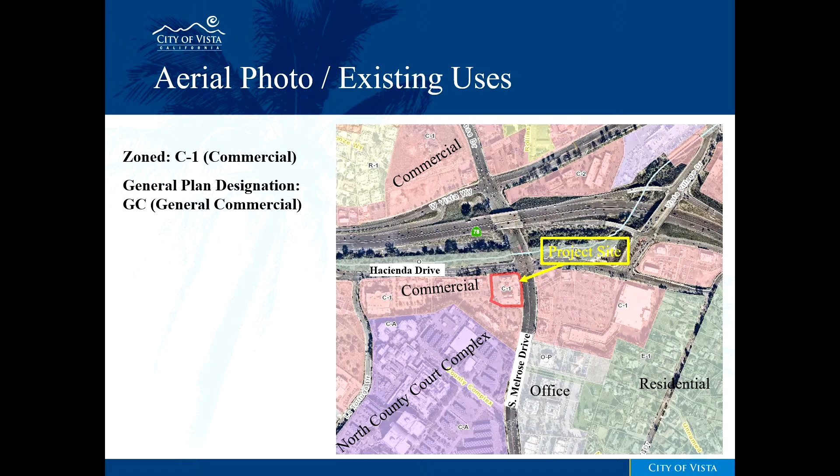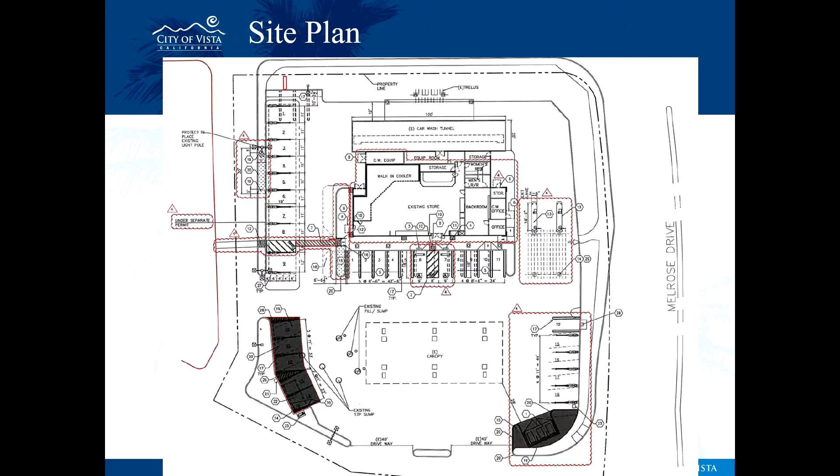This is the existing site plan, and no changes are proposed to the site plan or tenant space at this time. The property is located in Sheriff's Beat District 312 and has a crime index of 147.5% of the citywide average for 2022. An index greater than 120% of the citywide average is considered a high crime beat area. Total number of Sheriff Department calls for service since September 5, 2022 is 6 total calls. Almost all calls were for homeless activity outside the business.

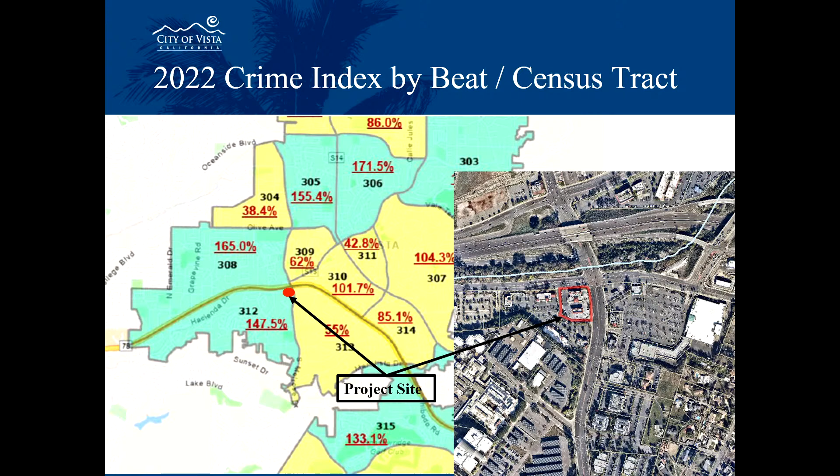An overconcentrated area, Census Tract 197.01, allows for up to 2 ABC off-sale licenses. There are 5 existing off-sale licenses in the vicinity, inclusive of the existing ARCO AM/PM. Those locations are the Costco Wholesale at 1755 Hacienda, CVS Pharmacy at 1631 South Melrose Drive, CVS Pharmacy at 635 South Melrose Drive, Albertsons Market at 1601 South Melrose Drive, and the current ARCO AM/PM at 600 Hacienda Drive.

Findings for the special use permit amendment: the proposed use is consistent with the general plan and any applicable specific plan. The proposed use and the manner to be conducted is permitted in the applicable zone and will conform to applicable federal, state, and local laws or regulations. The site for the proposed use has a size sufficient to reasonably accommodate the planned activities and will be served by existing infrastructure and utilities.

The design, location, size, and operating characteristics of the proposed use will be compatible with the existing and planned land uses in the vicinity. The proposed use at its location will provide the neighborhood and/or city with a service or facility that will contribute to its general welfare, and the proposed use and its operation will not be unduly detrimental to the health, safety, or general welfare.

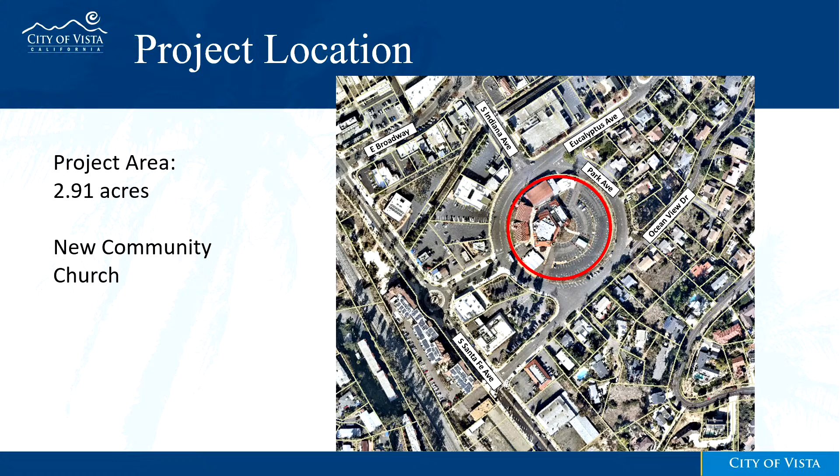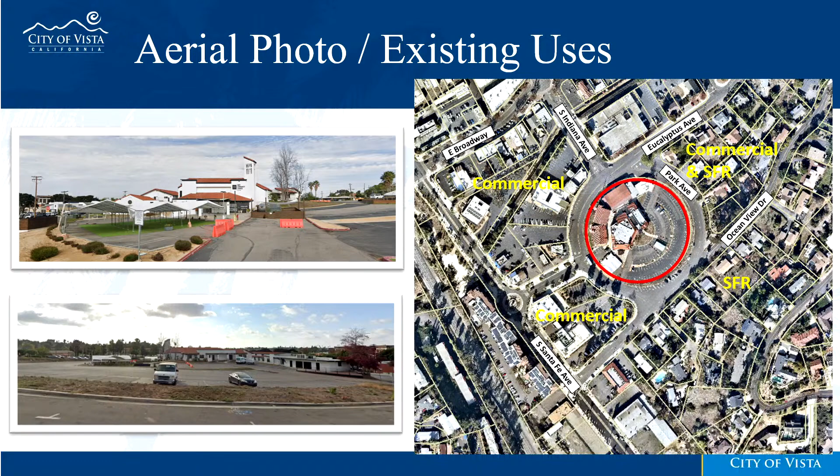The subject site is 2.91 acres, circular in shape, and is surrounded by Eucalyptus Avenue, Oceanview Drive, as well as Park Avenue. The site is currently developed with the New Community Church. Here's an aerial photograph of the site. Surrounding land uses include commercial and single-family residential to the northeast, single-family residential to the east, commercial to the south, as well as commercial to the west.

The general plan land use designation for the site is mixed use. The coinciding zoning is the Downtown Vista Specific Plan, which is located in the historic downtown subdistrict. That subdistrict allows for mixed-use commercial as well as high-density residential with a maximum density of 40 dwelling units per acre.

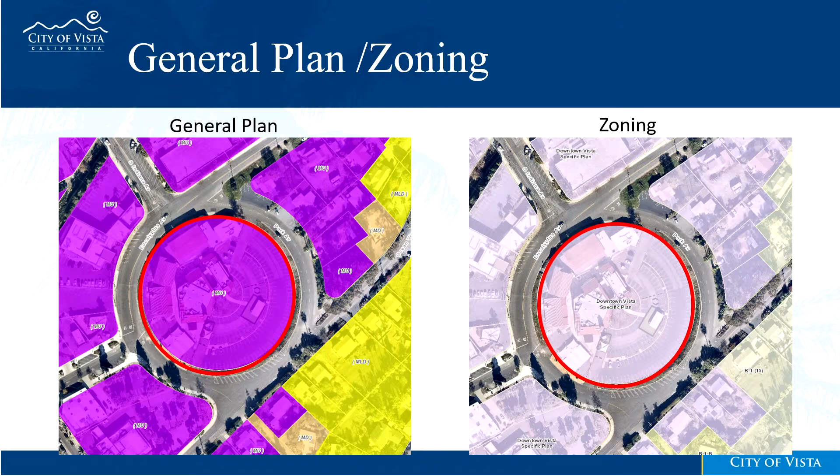The project before you tonight, again, is a request for a site development plan. The applicant is proposing 176 apartment units on 2.91 acres, which equates to 60 dwelling units per acre. The applicant is requesting a density bonus as a result of providing 18 very low-income affordable units. The project includes open space amenities, parking, site improvements, drainage improvements, wet and dry utilities, as well as associated infrastructure. In regards to recreational amenities, the project has been designed to provide a pool, spa, gym, seating areas, as well as a barbecue area.

The state density bonus law does allow for 3 development concessions based on the affordability component of this project. The applicant is requesting 2 concessions from the development standards of the Downtown Vista Specific Plan. Those concessions include an increase in building height and a waiver of a required 10-foot building facade step back.

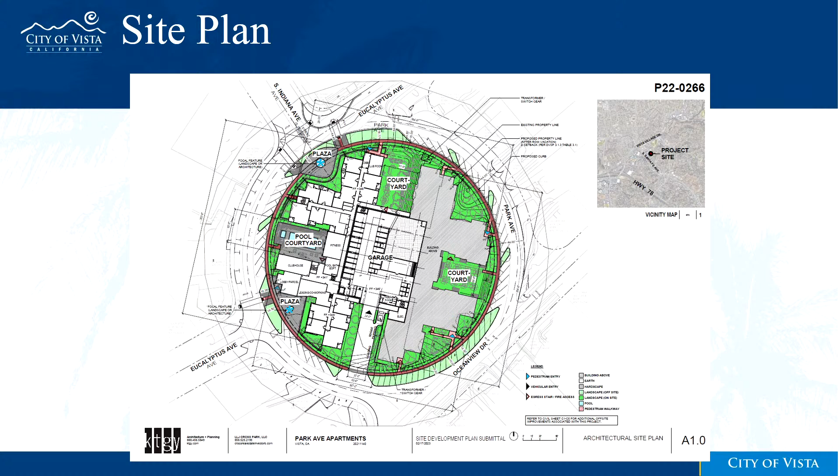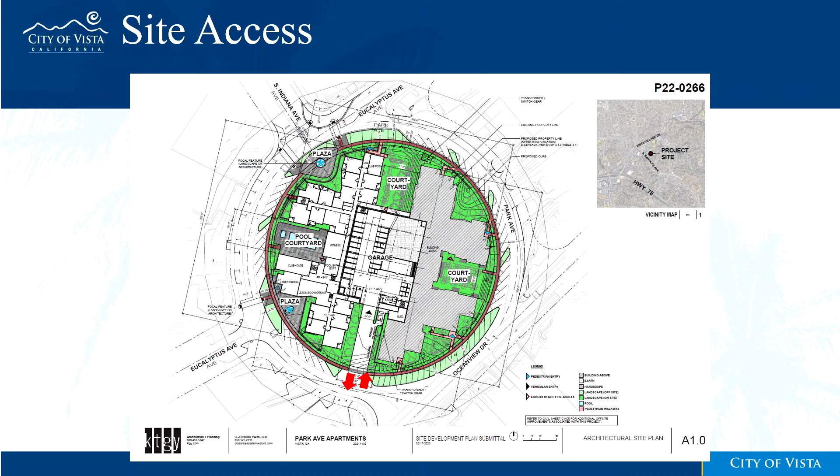The proposed site plan depicts a 4-story apartment building surrounding a multi-level parking garage, as well as landscape improvements surrounding the site. Vehicular access would be provided by a new 30-foot wide driveway that spans from Park Avenue to the parking garage entrance at the southwest corner of the project.

In regards to parking, the state density bonus law allows for a parking calculation of 1 parking space for 1-bedroom units and 1.5 parking spaces for 2-bedroom units. Based on the unit count, the proposed project is required to have 211 parking spaces on site. The project provides, as designed, 246 parking spaces. Staff notes that the project also provides 44 on-street parking spaces surrounding the site.

Staff notes that since this project does provide a minimum 11% of total units as very affordable, and it is located within 1/2 mile from a major transit stop, the state density bonus law does allow the applicant to request a parking ratio of 1/2 parking space per unit, just as a note.

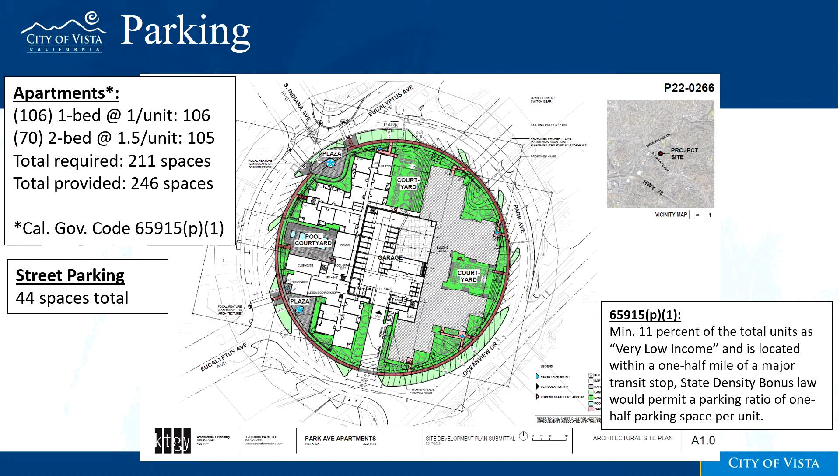In regards to landscaping, the site does provide 34% of the entire site dedicated to landscape improvements. The Downtown Vista Specific Plan requires a minimum of 5%. The proposed landscape plan does include native and non-native landscape plant materials.

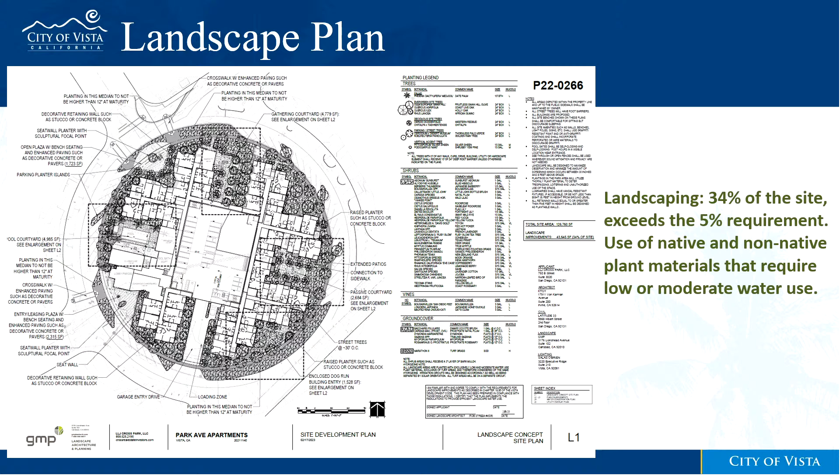In regards to amenities, the site plan indicates a pool courtyard on the west side of the project, a gathering courtyard on the north side of the project, a passive courtyard on the east, as well as a dog run courtyard on the southeast. In addition to the outdoor open space amenities, the project also has indoor amenities, including a clubhouse, fitness rooms, pet spa, and other small gathering spaces.

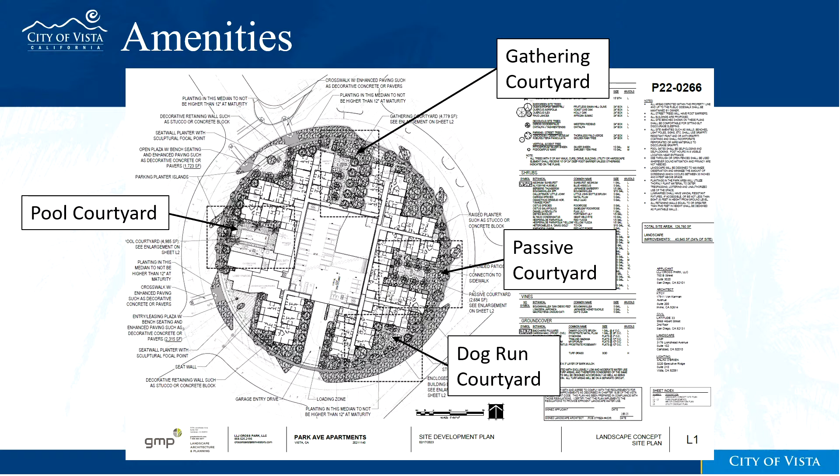Due to the drastic east-west slope of the site, the proposed project has been designed around a tiered grading approach, which utilizes the natural topography of the site. The first level of the development would include a first floor on the west side of the project. The second level would include the second floor on the west side of the project.

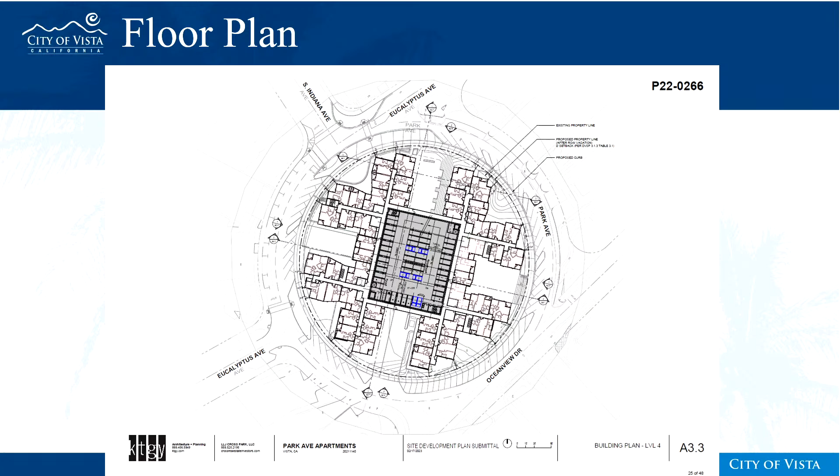The third level would include the third floor on the west side and the first floor on the east side of the project. The fourth level would be the fourth floor on the west side and the second floor on the east side of the building. The fifth level would be the roof of the west side of the project and the third floor of the east side of the building. And ultimately, the sixth level would be the fourth floor on the east side of the project.

The proposed project would be 4 stories, a maximum height of 59 feet from the average natural grade of the site. The architectural design of the building reflects an Irving Gill architectural style. Building features include 3 complementary plaster finish colors, wood grain horizontal composite siding, a decorative tower element, as well as storefront systems.

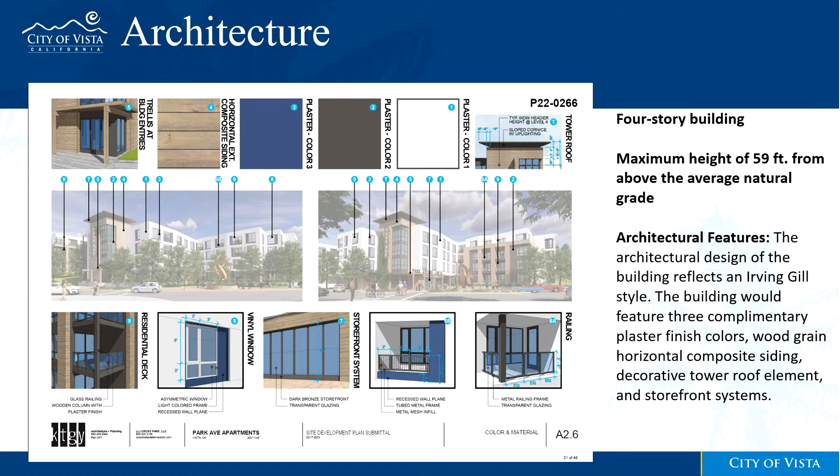Here's a perspective of the project taken from Eucalyptus Avenue. And here's a perspective of the project from South Indiana Avenue.

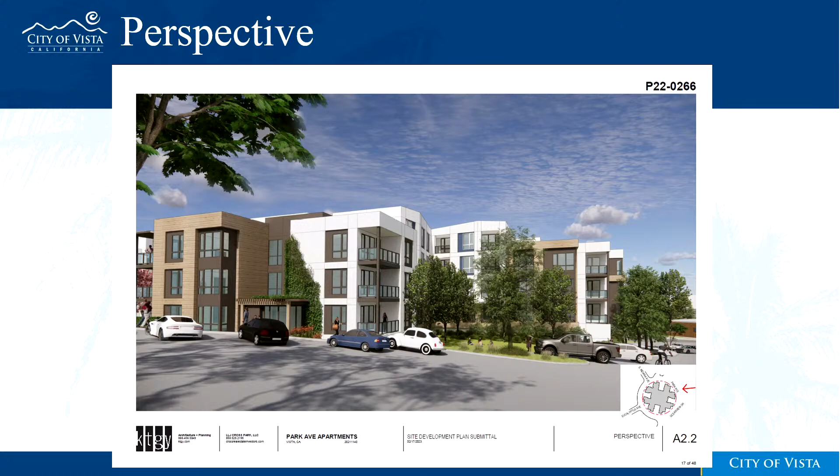Another perspective of the project from Park Avenue, as well as a perspective from Oceanview Drive.

In regards to the general plan and the Downtown Vista specific plan, the general plan land use designation is mixed use, which allows a maximum density of 40 dwelling units per acre. The proposed project includes 176 units on 2.91 acres, which equates to 60 dwelling units per acre, due to the fact that the project applicant is requesting a density bonus pursuant to state law.

In regards to the Downtown Vista specific plan development standards, the proposed project meets all applicable development standards except for two, which would be the building step back as I identified earlier, and the building height. The maximum building height in this area is 35 feet. The proposed project is proposing a maximum height of 59 feet pursuant to the requested concession.

In regards to parking, the state density bonus law requires a minimum of 211 parking spaces. The project is providing 246 spaces, and the project also complies with open space and landscape requirements.

This project went before the Planning Commission for an early design review on April 5th, 2022. Since the EDR session, staff and the applicant have worked in an effort to address the concerns raised during the EDR review. Those concerns include an increase in on-site parking.

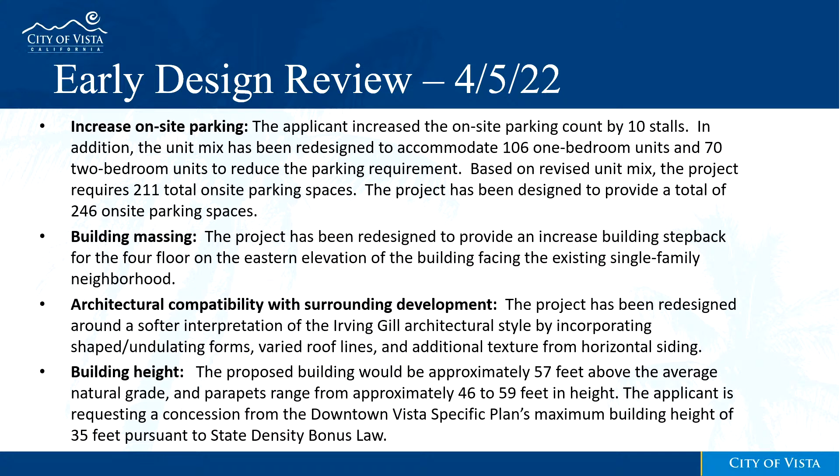The proposed project is covered by the program environmental impact report that was prepared for the Downtown Vista specific plan, as well as addendum number 1 for that specific plan. A consistency memorandum was prepared for the project. The conclusion of that memorandum indicates that the project will not have any new or substantially more severe significant impacts beyond those addressed in the program EIR or the addendum. All applicable mitigation measures for the program EIR will be enforced and applied on this project.

The project mitigation monitoring and reporting program includes mitigation measures that address cumulative traffic impacts, and those traffic impacts would be assessed via the payment of the street and signal development impact fee, which is $4,991.34 per dwelling unit. With that, staff is recommending the Planning Commission adopt the attached resolution approving a site development plan to demolish the existing church on site and construct 176 apartment units on 2.91 acres located at 165 Eucalyptus Avenue. That concludes staff's report.

The applicant, Greg Dracos, and his team is here, and they have provided staff with a presentation for the Planning Commission. Okay, if we can hear from the applicant now, please.

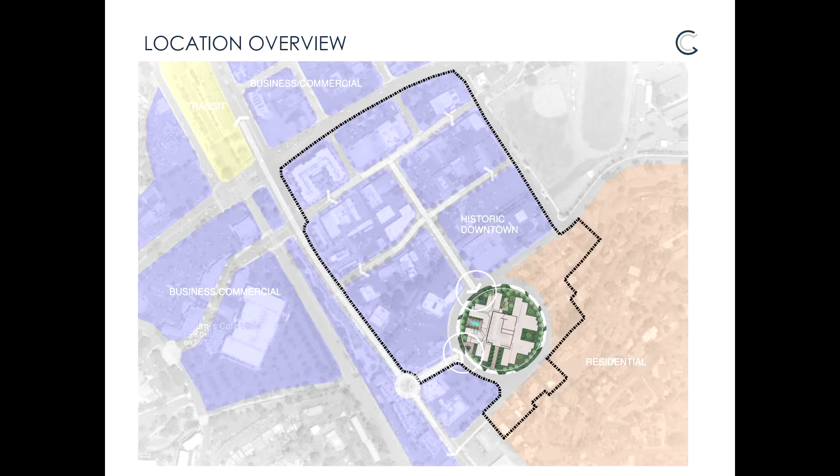So as mentioned, it's a transitional area with two buildings, and we have the concept of active versus passive courtyards. For connectivity, we'll provide 3 new pedestrian crosswalks connecting the building to downtown. There are 2 at Indiana, one of which is depicted on the site plan in front of you. There will be new sidewalks surrounding the entire site, with new landscaping incorporated.

We have 2 pedestrian plazas that hold public artwork, both looking down Indiana and looking east down Eucalyptus. We're incorporating new traffic calming measures, including curb pop-outs and new stop signs to make the area much safer from traffic with regard to pedestrian connectivity. And then new site and street lighting, which we heard from a number of people in the public is important for public safety if people are walking at night.

From the visual corridors, again, the public plazas hold public art. We have 2 sculptural elements, yet to be decided what they'll look like, but you can see on the left-hand side, coming in from Eucalyptus at the public plaza, one component of public art, and then from the north, coming down Indiana, another sculptural element that will be visible all the way from Vista Village Pub or Main Street.

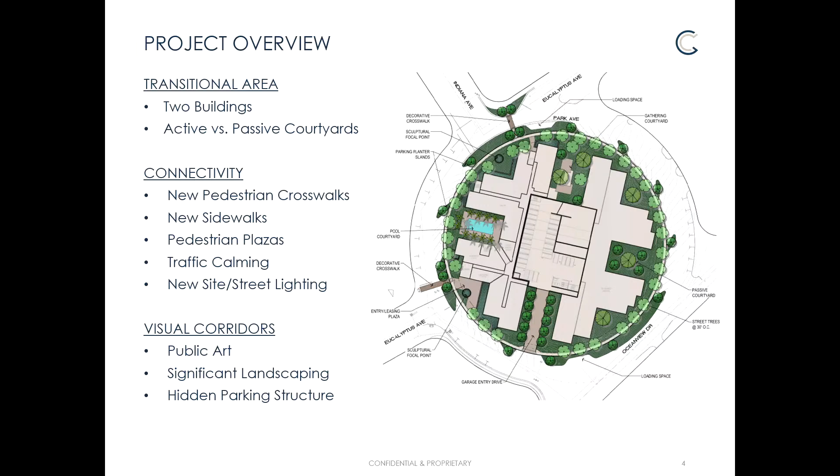So coming back to the topography and sight lines, these were some of the analysis, and I think this is something that the commissioners had asked for at the early design review that we study. There are more, of course, as you've seen in our packet. I just wanted to pull these two to be representative of the work that was done.

But this gives you a sense, and I think there was some mischaracterization at the early design review hearing, because we didn't have this information, that the building was going to be overbearing or looming over either the homes or even up to the height of homes on the upper portion of Ocean View. But what you see here on the top photo, this section view shows that even with the building at full scale or full height, the homes on the upper portion of Ocean View have an unrestricted view as they do today over the top of the building.

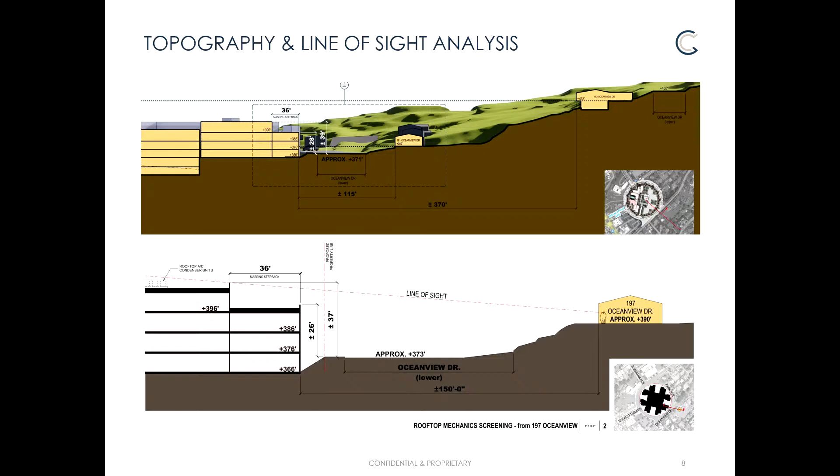What you see on the bottom is a better sense of the building being set lower on the Ocean View side relative to the street grade, so that you're not actually seeing those 4 floors, you're almost starting level with the second floor at the Ocean View street grade. So we've made a great deal of effort to reduce that impact of height, scale, and sense of massing on the residential side of the building.

Regarding the design, this is a tricky one. Design is very subjective. We did walk away from the early design review with some feedback from the commissioners to explore the Irving Gill design. We spent a great deal of time doing that. We debated whether to include the actual renderings of that design in this presentation, lest we scare anybody.

It did not come out, unfortunately, as we would have hoped. So we acknowledged some of that feedback and did our best to utilize some of that design and that style of Irving Gill, and bring it into a more modern design. I think the good things to come out of that, you can see this is the old design that we had prepared a year ago.

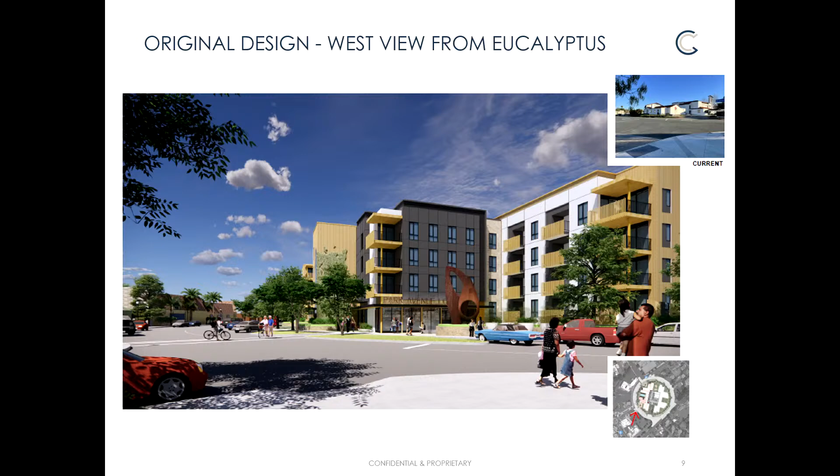It's not very clean. The balconies sort of hang off the sides. You have these dark facades, very flat and rigid roof lines that give you the sense of, here's the absolute height of the building. What we tried to do was soften it up, as Michael mentioned, and create more of this sense of brightening up the building, creating an undulating facade, this sort of structural facade that waves as it goes through. So it's not just a flat face and then an undulating roof line.

It was interesting because we were looking at a lot of different buildings, looking at different styles, and this roof line struck everybody in the team. This undulating facade is something that helps the roof line disappear a little bit more as you're looking up into the building, as opposed to just being sort of a rigid picture frame like we had in the original design.

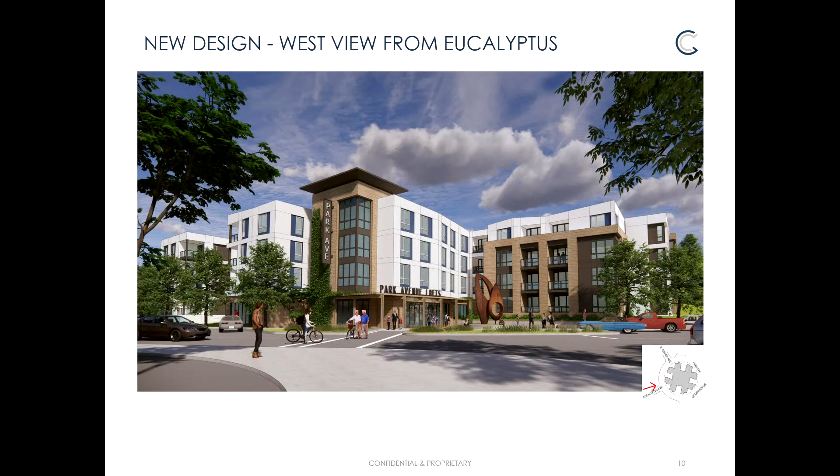At first, in our other design, we'd really thought about using the building to frame the sculptural element and not having as much vegetation there. But by cutting the building further in, we're able to provide more landscaping and further reduce that sense of scale and mass of the building.

And then finally, the view as you're coming down Ocean View, maybe turning to the right on Park, a little more on Park here, but you can see some of the step backs. You can see a similar roof line breaking up that undulating roof line at the upper floors, and then of course more landscaping and additional open space, as well as setting the building down as it would curve to your left, setting it down below grade.

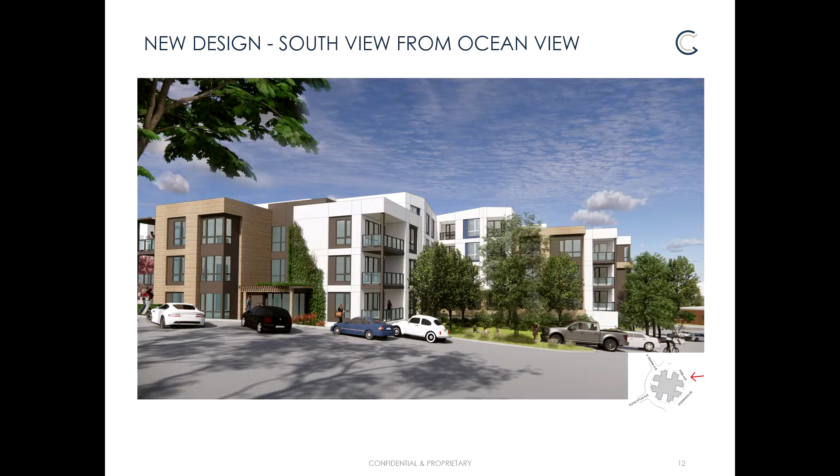And that's all I have. So thank you very much, and I'm available for any questions.

Very good. Thank you. Commissioners, questions of staff or the applicant? Commissioner Grimm.

Actually, this question, I believe, is for staff, and it's regarding the concessions on the project. Let me find my notes here real quick. The fact that the applicant's providing 18 affordable units, and this is a question just to make sure I'm following this okay, that allows a 50% density bonus from the state.

We can't do anything about that. It also brings into play three different concessions, and those concessions were building height, the setbacks, and then the parking. I'll have to correct you on that. There's only two concessions, and it would be the step back for the east elevation of the third floor of the building, and the building height, total building height exceeds the specific plan requirement. The parking is not a concession, that is a requirement from state law.

Okay, but it's still a reduction. Normal parking would— It is a specific requirement of the state that is different from the Downtown Vista specific plan, correct? Right, we're getting wrapped up in semantics here, but basically there's three things that are different than a normal project, because they're providing affordable housing essentially. And I guess my point is that those are all mandated through the state, and the city here can't do much about those anyway, right? That's correct. Okay, that was just the point I was trying to make.

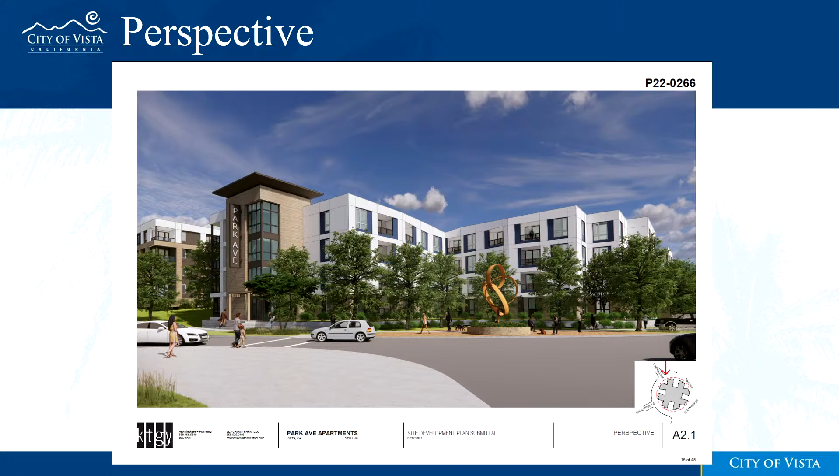I would like to get an answer, though, from the architect on that particular perspective. Would you identify yourself for us? Sure, yeah, Darren Schoolmeister, I'm with KTGY, the architect for the project.

Yeah, so the concept on that particular facade was really to let the artwork and the landscape be the show, and have the architecture or the facades themselves be much more of a backdrop. There is still a fair amount of articulation in terms of the folding planes of the facade and how the parapets are going up and down, and we've added accent colors with the fenestration patterns of the windows. But the idea was to focus the siding materials on the tower form where the entry is, to give people a wayfinding device, but let the artwork really be the star at the end of the street there.

Thank you, Commissioner Savage. Yeah, I have a couple items.

First, I just want to check in with staff about that recommendation of the speed limit on Ocean View. Is that something that could be part of this project, or something that needs to be looked at in the future? I think that's something that needs to be addressed at the Traffic Commission, and we could relay it to our traffic engineer, but I don't think we can address it tonight. I just want to mention that I think that's an issue with or without this project that the Traffic Commission should probably address and work on.

That suggestion that maybe wayfinding apps might not take people through that way was really awesome, because that's definitely how a lot of people find out about it.

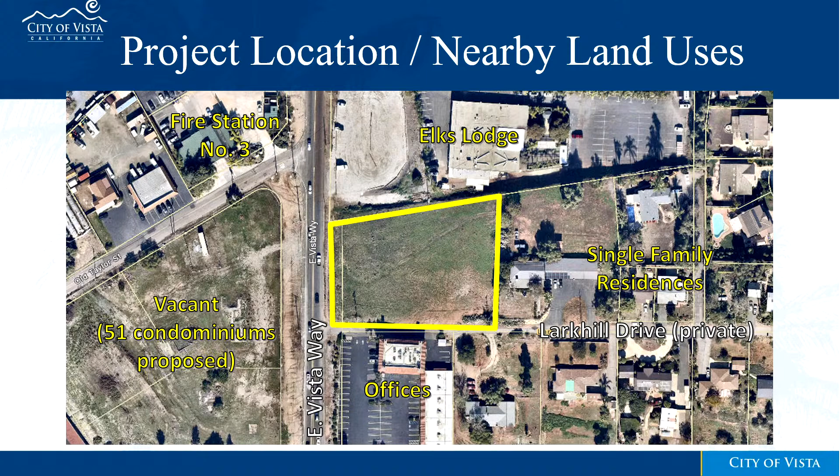This aerial image shows the project site, how it looks now, and surrounding land uses, which include Fire Station number 3 to the northwest across the street. Across the street to the west is also a vacant lot, known as the Voza Corner, which currently has a project in the works for 51 condominium units. To the north is the Elks Lodge. To the east are single-family residences, and immediately to the south are commercial office uses.

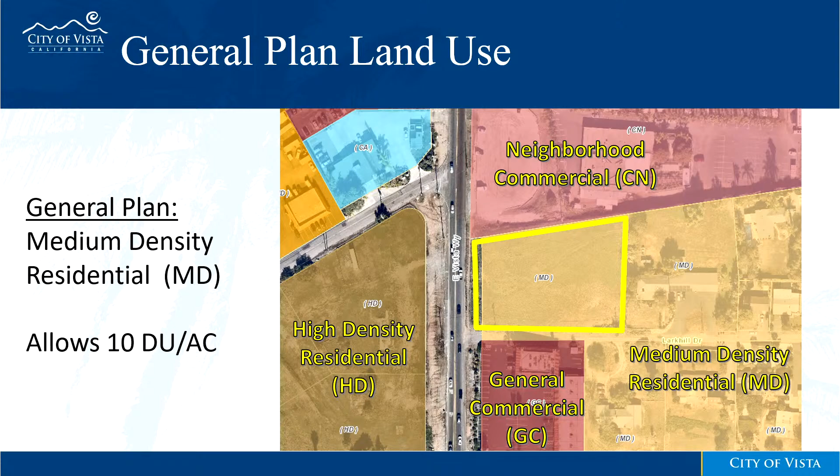The general plan land use designation for the property is medium-density residential, which allows 10 dwelling units per acre maximum density. The zoning is RM10 multifamily residential, which coincides with the general plan designation, and its maximum allowable number of units is 10 dwelling units per acre.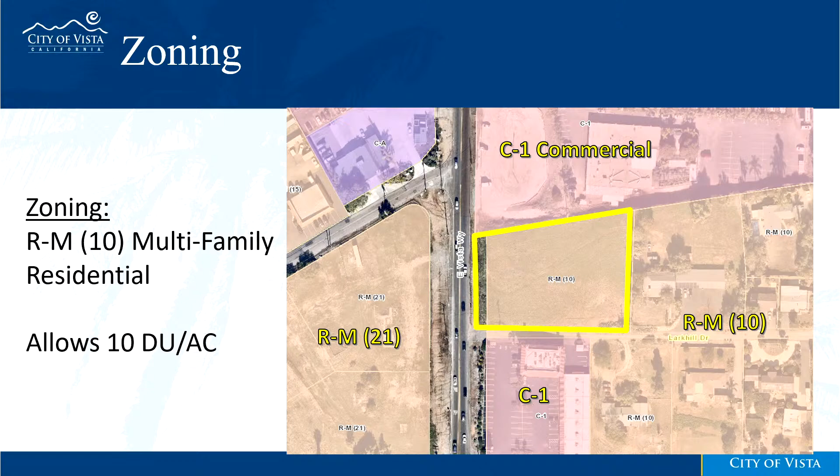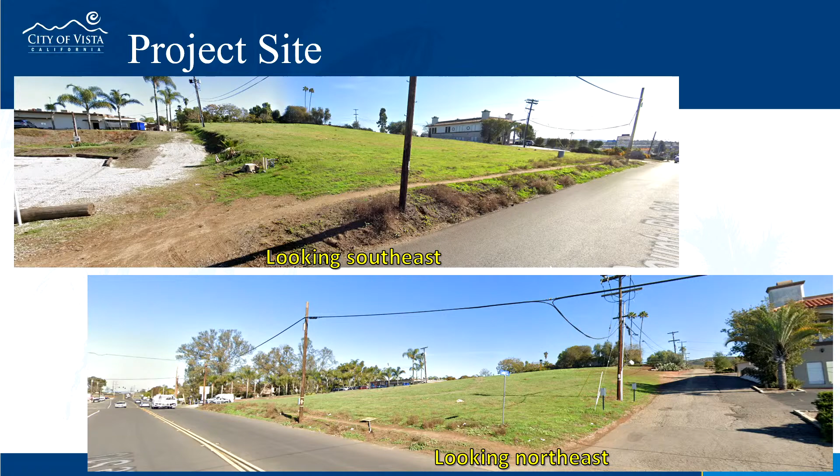This is the project site looking southeast towards the commercial offices, shown in the picture on the top of the slide. That's the Elks Lodge on the left-hand side. The lower picture is looking towards the northeast.

Project specifics include 13 apartment units in 6 buildings. All are three-bedroom units proposed, ranging from 1,287 square feet to 2,938 square feet. A 2-car enclosed garage is included for each unit. The 2 units that comprise the duplex at the rear of the property have 3-car garages. The proposed density is 9.5 dwelling units per acre. The proposed height is 2 stories at 27 feet; the maximum for the zone is 2 stories or 35 feet. Parking: 41 total spaces proposed, consisting of 28 garage spaces and 13 guest spaces. 39 are required by code, so there's 2 more than required.

Open space and amenities: the initial design has 5,268 square feet of common open space and 558 square feet of private open space, which is the average based on green space plus balcony area for each unit. Each unit features a private balcony ranging from 132 to 224 square feet, and private ground level open space ranging from 325 to 570 square feet. Other amenities include outdoor barbecue areas centrally located adjacent to units 2, 7, and 8, and common landscape areas with bench seating and tables.

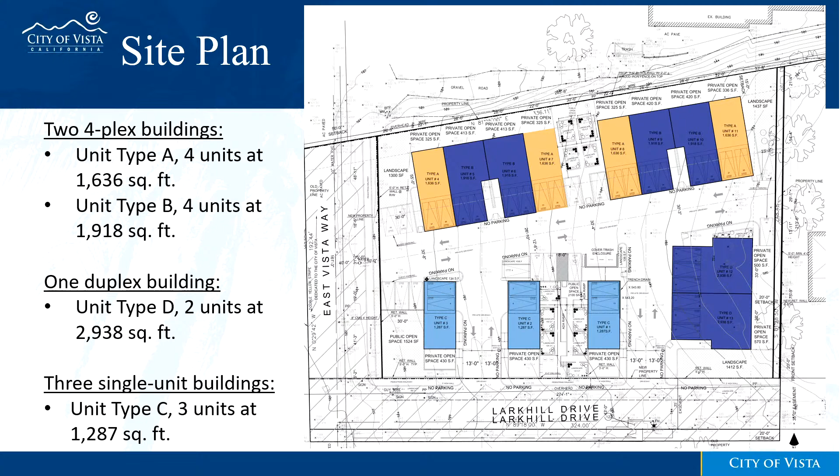This is a close-up view of the project site showing 2 gated access points connecting to Larkhill Drive, a private road on the south - that's where the green circles are. There's a centrally located trash enclosure roughly in the middle of the project site, highlighted in green. And there's 2 outdoor barbecue areas, centrally located, adjacent to units 2, 7, and 8, highlighted in red.

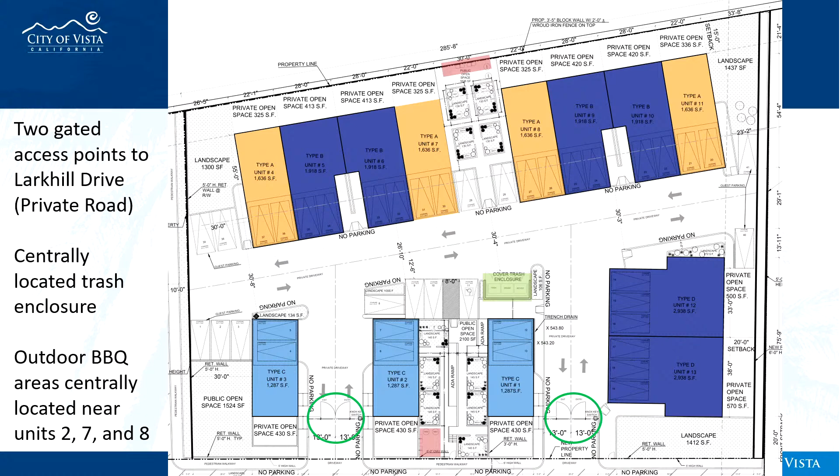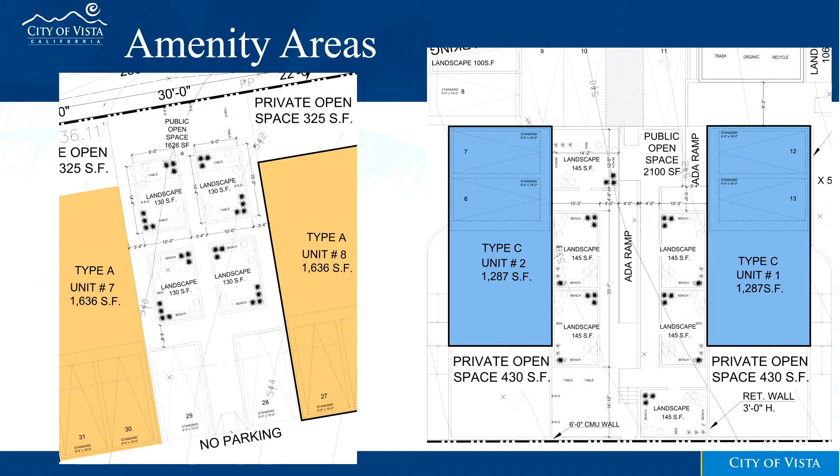The amenities area is shown in close-up view, showing landscape pocket areas between the buildings on the north side of the project site and on the south side, which include the barbecue areas.

The building architecture, as described by the applicant, is Spanish-style with smooth stucco exterior in a banana cream color, red tile terracotta roof, dark rustic wood features for the garage entrances and window trim, and black iron railing.

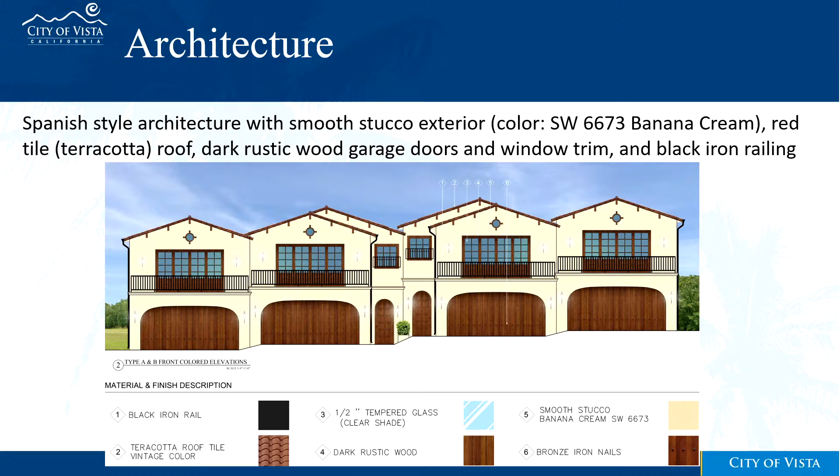This is the architecture for unit type A, which is the end units to the fourplex. On the right-hand side of the slide is unit type B, which are the interior units to the fourplex.

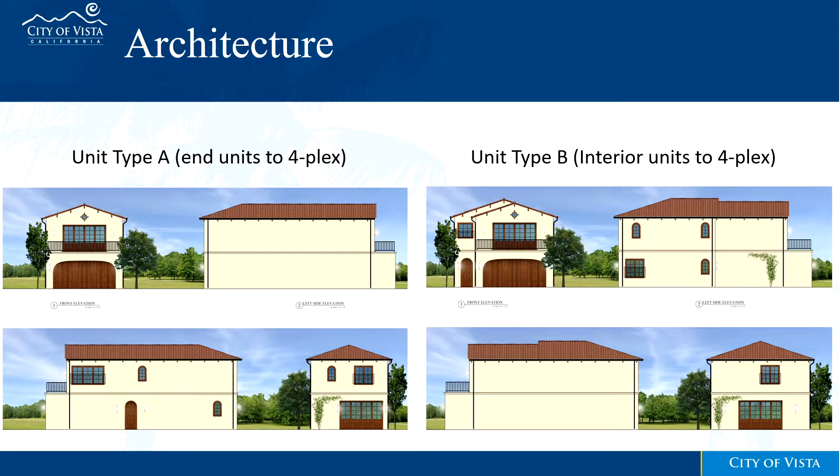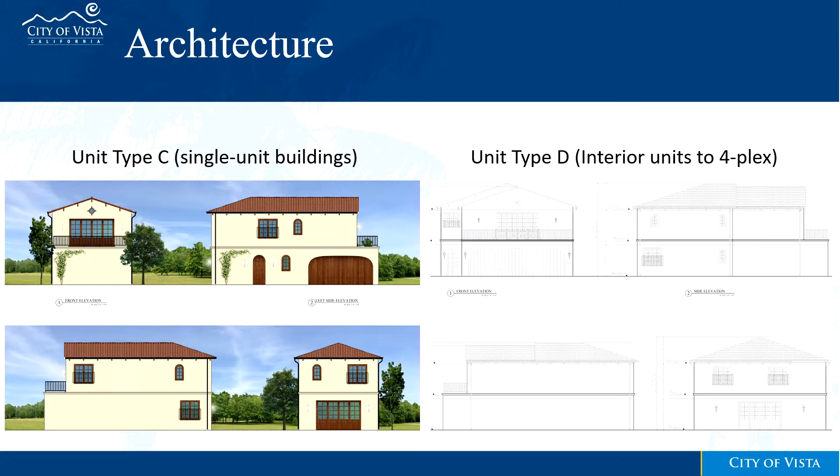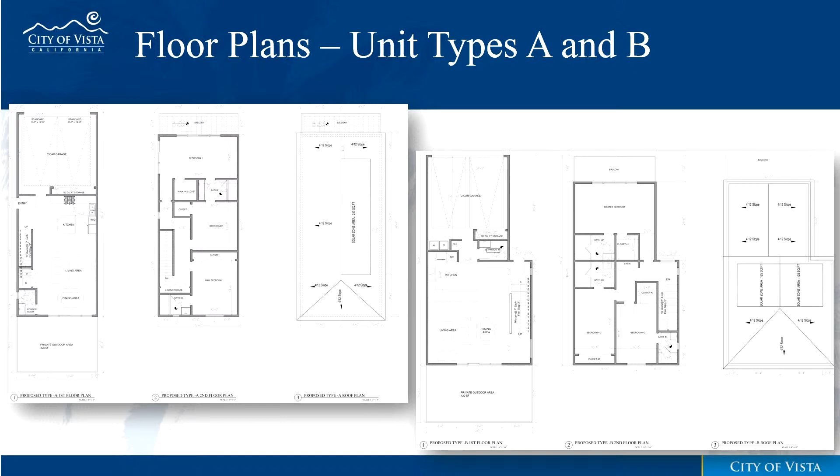Staff's request is that the Planning Commission provide comments to the applicant related to the proposed design of the project. No formal vote or action on this item is required. There are also 2 slides, if helpful, with some site photos provided by the applicant.

Thank you. Okay, thank you, Chris. Is the applicant here, and would you like to make comments about your proposal to the commission? Okay, very good. We have the project architect and engineer with us, as well as the owner.

Okay, commissioners, questions of staff or the applicant? Chris, I had 2 real quick questions while they're thinking about it.

Number 1, East Vista Way is going to be improved to its ultimate right-of-way by the project? That's correct. And we currently allow parking on East Vista Way in front of Chow's, correct? I believe that's correct, I haven't looked at the project that closely at this point. And then what's our minimum width of a private street that allows parking on one side? From the top of my head, I believe it's 32 feet. 32 feet, very good, thank you.